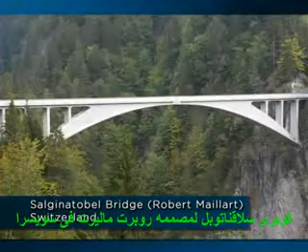Now, having said that, I should add that today's near universal use of science-based methods hasn't diminished the importance of experience in engineering design. Many of the modern era's greatest structures, for example, Robert Maillart's beautiful Salginatobel Bridge in Switzerland, used fundamentally empirical design approaches that were informed by scientific principles, but they were really guided by experience, by observation, and by experimentation.

And on the other hand, some of our greatest failures, for example, the infamous collapse of the Tacoma Narrows Bridge in Washington State due to wind-induced vibration, resulted, at least in part, from over-reliance on science and inadequate attention to past experience. We'll look more at this case in Lecture 16.

Still, engineering as we know it today simply couldn't be performed without science. And just as scientific principles are vitally important tools for modern engineers in practice, so these principles are also a vitally important component of this course. There are 3 reasons why it's worth your time to invest in learning the science of structures, and more specifically the science called engineering mechanics.

First, science provides a sort of a shortcut to understanding. If we wanted to learn how columns work, one approach might be to build a whole lot of columns, hundreds of columns, and then take them into the laboratory and test each one and observe how it behaves under load. Observe how differing geometry and different materials affect the strength of those columns. And then based on all that data, try to generalize some sort of overall conclusions about how columns work.

That's one approach. Or we could glean the same level of understanding from a 15-minute introduction to basic scientific principles governing column behavior. Given our short time together, I think we'll adopt the latter approach.

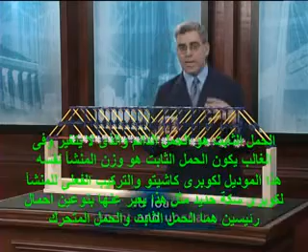Dead load is load that is permanent and unchanging, and the most important type of dead load is the self-weight of the structure, its own mass. Live loads are called live loads because they vary in both magnitude and location. So typical examples of live load for a railroad bridge like this would be the weight of heavy trains crossing the span, as well as a variety of different kinds of environmental forces. For example, when the wind blows on the side of the bridge, it exerts pressure that constitutes wind loading.

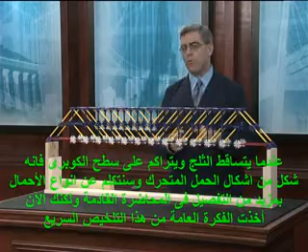When snow falls and accumulates on the deck of the bridge, it adds weight, which is another form of live load. We'll be talking about loads much more comprehensively in a later lecture, but you get the general idea from this quick summary.

Now, my physical model bridge happens to weigh 2 pounds, so that's the dead load associated with this structure. And to simulate the live load of a locomotive crossing the span, I'm going to take this steel weight, which weighs 3 pounds, and I'm going to hang it precisely in the middle of the bridge at mid-span. Okay? So those are loads.

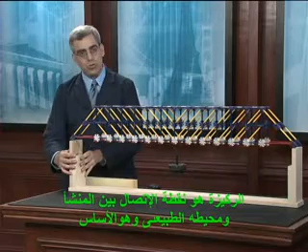The second type of external force is the reaction, and a reaction is defined as a force that's developed at a support in response to those applied loads. A support is just a physical connection between the structure and its physical surroundings, its foundations. So the supports are located right here at this point and at the equivalent point on the opposite end of the bridge. It's important to recognize that reactions are caused by loads. We're going to explore this process and understand how it happens in just a minute.

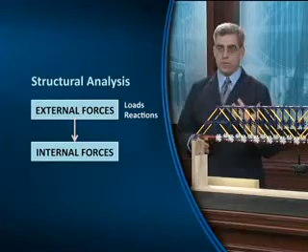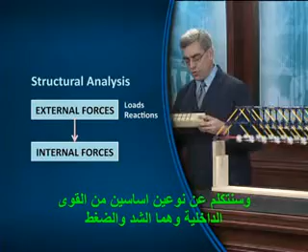But first, let's move on to the next step in our roadmap, internal forces. Internal forces are caused by external forces, but internal forces occur within the individual structural elements. We've already talked about the two principal types of internal forces. They are tension and compression. When I apply a load to the Chuto Bridge, tension and compression are actually generated within all these individual structural members of the bridge. You can't see that, though.

What you can see, though, is that when I apply load to the bridge, it does bend downward slightly. It turns out that a truss is very similar to a beam. And you can see that when I bend this beam, both compression and tension are occurring within the beam. The top surface gets a little shorter, the bottom surface gets a little longer, and so we have compression in the top, tension in the bottom, which occur as a natural consequence of bending or flexure. It turns out that trusses work exactly the same way.

So when we apply this large load out here at midspan, we're actually generating a significant amount of compressive internal force in all of the members that run along the top of the bridge, and a significant amount of tensile or tension internal force along this member that runs the entire length of the bottom of the bridge.

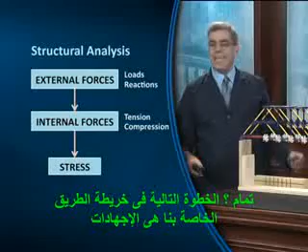Okay? Next step in our roadmap is stress, which is defined as a measure of the intensity of internal force. Stress is actually a distributed force. It's distributed over the entire cross-section of a member. And when I refer to the cross-section, I'm talking about the view of the member when you look at it from the end. So the square shape that you see here is the cross-section of the member. Stress is internal force distributed over that cross-section.

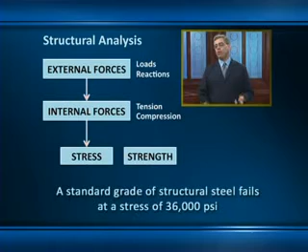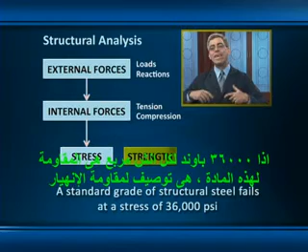So it's always expressed in terms of force per area, for example, pounds per square inch or newtons per square meter. It's really the same as a pressure, the sort of pressure that you experience when you check the pressure in the tires of your car. Stress is a really important concept because the strength of a material is defined in terms of characteristic values of stress. For example, a standard grade of structural steel fails at a stress of 36,000 pounds per square inch, PSI. So 36,000 PSI is the strength of this material, its characteristic failure stress.

Okay, so the final step in our roadmap is to evaluate the performance of the structural element by comparing stress against strength. If stress is greater than strength, then the material is going to fail. If the stress is less than the strength, then we could expect no material failure and the structure is going to be able to carry load safely. This evaluation is the ultimate goal of structural analysis. And that's our basic roadmap.

And I really have to add that it's a significant simplification of the real-world considerations in structural analysis. Practicing engineers are actually concerned with far more than just stress as a measure of performance. For example, deformations are also a major consideration in the design of most structures. But for our purposes in this course, this is a good starting point. The map will get us where we need to go.

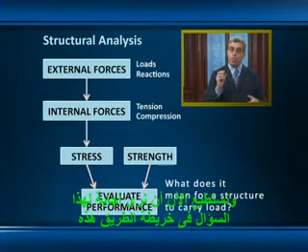And most importantly, the map equips us to answer a question that is absolutely essential to our purpose in this course. What does it mean for a structure to carry load? We can now see the answer to this question right here in the roadmap itself. A structure carries load successfully if the stresses that are caused by external forces are less than the strength of the associated material. Okay? So that's our roadmap.

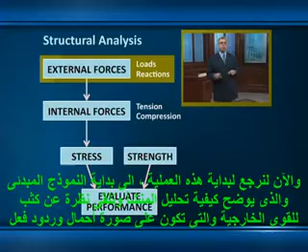Now we've replaced the supports with scales, which will allow us to directly measure the reactions. I'm going to place the bridge onto the scales. Remember that the bridge weighs 2 pounds, and as you can see from the readings on the scale, makes sense. The 2-pound bridge caused the scale to register 1 pound on one side and 1 pound on the other.

Now I'm going to replace that live load that was applied at midspan, and remember the live load weighs 3 pounds. And just as you might expect, when I add the 3-pound load, each of the two reactions increases by half that amount, 1.5 pounds. So we now have a total of 2.5 pounds of reaction on this side, 2.5 pounds of reaction on the other side. And guess what?

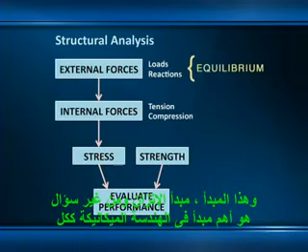It all adds up. The total downward load is the weight of the bridge, 2 pounds, plus the additional 3-pound live load. That's a total of 5 pounds. The total upward reaction is 2.5 plus 2.5, also 5 pounds. All of the forces acting on this system are in balance, and therefore the system is said to be in equilibrium. And this principle, the principle of equilibrium, is without question the most important concept in all of engineering mechanics.

As best we know, the first person to discover and publish the principle of equilibrium, as we understand it today, was a brilliant Flemish Renaissance-era mathematician named Simon Stevin. In 1586, Stevin demonstrated this principle with an ingenious proof, which is shown here. This is a kind of a thought experiment consisting of a string of evenly spaced circular beads draped over an inclined plane. The gist of the proof is that the larger number of beads on the shallower slope exactly balances the smaller number of beads on the steeper slope. And this shows how forces in equilibrium balance each other out.

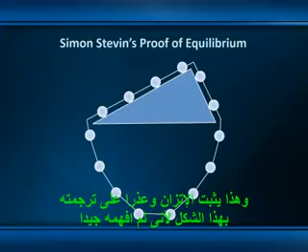Although Simon Stevin's work was groundbreaking, though, it really had little immediate impact either on the world of science or on the world of engineering, possibly because Stevin published only in Dutch, and Dutch wasn't spoken widely outside of the Low Countries, but also probably because Stevin was so far ahead of his time. 100 years later, though, the time was right.

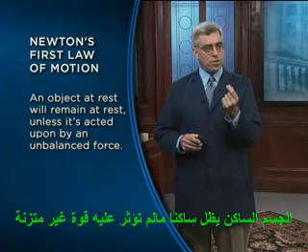And in 1687, the great Sir Isaac Newton literally changed the world with his publication of the Mathematical Principles of Natural Philosophy, or Principia for short, one of the most influential works in the history of science. Newton's Principia included his 3 laws of motion, which form the foundation of modern engineering mechanics even to this day. Over the next few lectures, we'll be using all 3 of Newton's laws to help us understand great structures. But today we want to focus on just the first law. An object at rest will remain at rest unless it's acted upon by an unbalanced force.

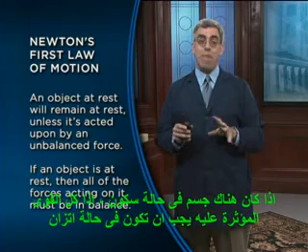Let me try stating that a little bit differently and more usefully for our purposes here. If an object is at rest, then all of the forces acting on it must be in balance. So, what does it mean for forces to be in balance?

To help us explore this question, I'd like to introduce an important graphical problem-solving tool called the free body diagram. This tool helps us guide our quantitative solutions to equilibrium problems, but perhaps more importantly, it helps us see the fundamental characteristics of the systems that we'll be analyzing. We'll be using it often throughout the course.

And so what I'd ask is, as I talk through the creation of the free body diagram, you might want to consider drawing one yourself. It's a great way to experience Isaac Newton's ideas quite directly. And to help you along, I'm going to simulate drawing a free body diagram of my Chouteau bridge model in its current loading configuration by actually building the diagram on screen, one graphical element at a time.

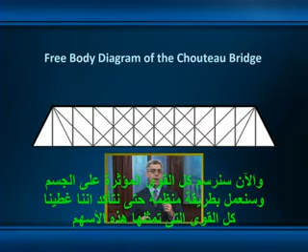We'll start with the object of interest itself. That's the bridge. We isolate it from its supports. We remove the physical supports in order to cause the bridge to now become a free body. That's why it's called a free body diagram. Now we're going to draw all of the forces acting on the body. We're going to work systematically to ensure that all the forces are accounted for.

We'll begin with the 2-pound load that's applied to the structure right there in the center at midspan. And of course, that's the dead weight of the structure, the self-weight, and so it's oriented in the downward direction. Next, we want to add the 3-pound live load corresponding to the weight of the locomotive crossing the bridge. Again, that's applied at midspan and it's oriented in the downward direction. And as we just learned through our experiment involving placing the bridge onto the two scales, we also have two 2.5-pound reactions, and they're oriented upward out at the ends of the bridge.

Now all we need to do to complete the free body diagram is to add some dimensions. The bridge is 4 feet long, and we want to show that the two loads are precisely located at midspan, so we'll show those two 2-foot dimensions. Now, it's pretty easy to see from this diagram that all the forces acting on the body are, in fact, in balance. We have a total of 5 pounds down. We have a total of 5 pounds up. And this sort of qualitative equilibrium analysis is quite simple because all the forces happen to be acting in one direction, and that's the vertical direction.

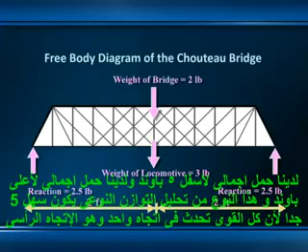But what would happen on our model of the Chouteau bridge if the train that was crossing the bridge suddenly slammed on its brakes? That would have the effect of applying a strong horizontal load to the structure. So when the train slams on its brakes and delivers that horizontal load, something has to prevent the bridge from sliding sideways like this. And of course, that something has to be an additional reaction developed at the supports of the structure. So clearly an additional reaction is required, and we need to show that on our free body diagram.

Here's that additional 1-pound horizontal load, again applied by the train slamming on its brakes, and here's the 1-pound reaction applied at the far support in the opposite direction, counterbalancing the 1-pound applied load. This little demonstration shows that having all forces in balance on a body means that we actually have to separately consider forces in the horizontal and vertical directions. We have to consider them independently of each other. All forces in the horizontal direction have to be in balance, and all forces in the vertical direction also have to be in balance. They're two independent conditions for equilibrium. But now what happens if the locomotive moves to some other point along the length of the bridge?

Suppose I move this 3-pound load from midspan out to, say, the 1/4 point along the length of the span. What does your intuition tell you about how the reactions are going to change in response to that change in the position of the load? I won't change the magnitude, just the position. What does your intuition tell you? Will the reactions change? If so, will they get larger? Will they get smaller? What do you think?

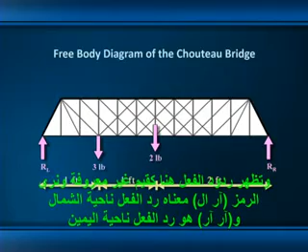In this case, all we really have to do is modify our existing free body diagram, shifting the load to show its new off-center location at the 1/4 point along the length of the span. We've also now shown the reactions as unknown quantities, R sub L, that's the reaction on the left-hand side, and R sub R, the reaction on the right-hand side. With this free body diagram complete, we're now ready to investigate the balance of forces using our three equilibrium equations.

And as we do this, I suggest that you think of the equations as a bookkeeping tool that really just helps us keep track of forces and moments. It's really nothing more. In this particular analysis, we don't even need to use one of the three equations, the sum of forces in the x direction, because there are no forces on the body in the x direction. So we can start our solution by writing equilibrium equations for the sum of forces in the y direction. We do that summation systematically, working from left to right.

We start by showing the sum of forces in the y direction equals 0. We assume that upward is the positive direction. And here's that equilibrium equation. All we did was account for each force. RL, the reaction at the left-hand end, is upward, so it's shown as positive. The 3-pound and 2-pound loads are in the downward direction, so they're shown as negative. And the unknown reaction on the right-hand side is also upward.

We can do a little bit of algebra and determine, just by doing some algebraic manipulation, that the sum of those two reactions must be equal to 5 pounds. And in fact, that makes perfect sense. It's exactly what we saw in the physical model. No matter where we move the load, the reactions added up to 5 pounds.

Now we have to use our third equilibrium equation, the moment equation, to attempt to actually calculate the values of those reactions. If the body's in equilibrium, then the sum of all moments acting on it about any point has to be 0. We can select any convenient point to use as the basis for this calculation, and so we're going to use the left-hand end, annotated as point P on my free body diagram. And here's what that equation of equilibrium looks like. I won't talk through it in detail.

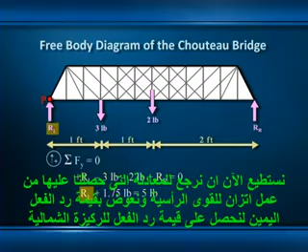We can now return to our equilibrium equation for the sum of forces in the y direction, substitute that value back into the variable for the right-hand reaction, and solve for the unknown force in the left-hand reaction, and that turns out to be 3.25 pounds. And to quote Archimedes, eureka! This is exactly what we see in our two scales. So in case you had any doubts, the principle of equilibrium actually works.

Congratulations on having completed what very well may be your very first quantitative solution to an engineering problem. I hope you're beginning to see that the quantitative application of scientific principles can help us see structure in new and exciting ways. In this lecture, we developed a roadmap that depicts how a structure is analyzed. And we focused on that first step in the roadmap.

Next lecture, we'll visit all of the remaining destinations on the roadmap of how to analyze a structure, and we'll see that the principle of equilibrium that we just talked about also has important implications beyond external forces. In doing this, we'll equip ourselves with all the tools we need to see and understand structure in the world's greatest buildings, bridges, and towers.